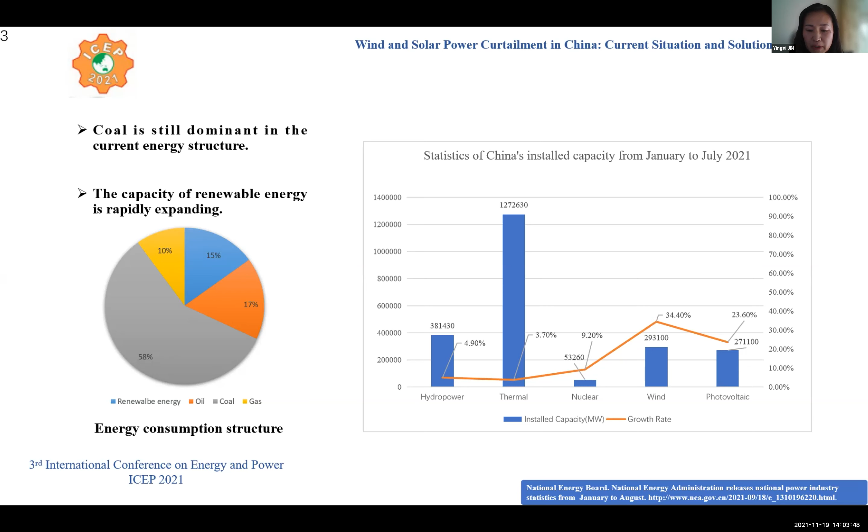Generally, wind and solar resources are abundant in China, but incredibly diverse across various areas. In 2006, the National Climate Center applied a data modeling method to assess the wind energy resource in China, concluding that at 10-meter height above ground level, the technically exploitable wind energy resource is about 2,548 gigawatts, corresponding to around 7,644 terawatt hours of power generation, assuming the annual average number of windy hours is 3,000.

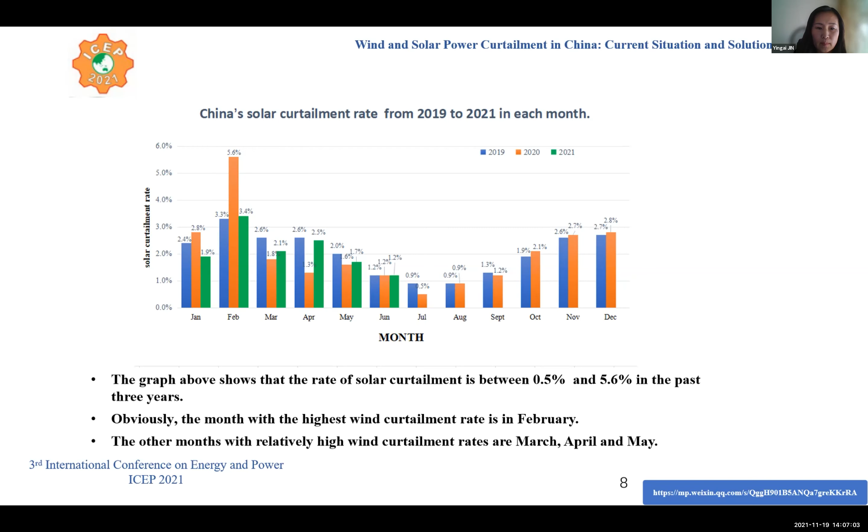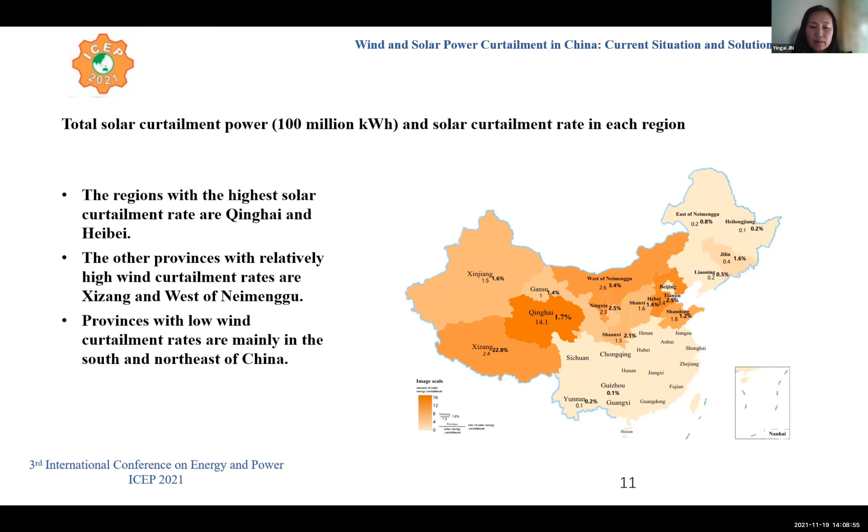Next, we'll introduce the phenomenon of wind and photovoltaic power curtailment in Jilin province.

Jilin province is one of the 10 million kilowatt level wind power regions. The installed capacity of Jilin province is 22.8 million kilowatts. Wind power has become the second largest power source in Jilin province after coal power.

The maximum output power of wind appears between 12 to 16 in spring and after 19 in winter. The minimum output power of wind appears between 10 to 16 in winter and after 20 in winter.

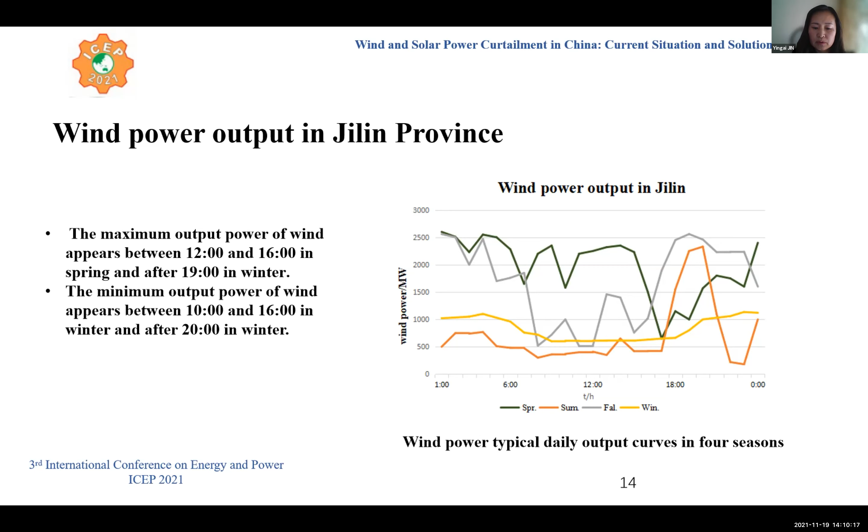During the heating season in winter, the CHP unit and the wind power generation conflict between 2 a.m. to 5 a.m. and 19 to 23 every day. At this time, it is the period of wind power generation, and the cogeneration unit will provide a corresponding heat supply during this period. The heat load is also relatively large, and the minimum power generation of the unit is also relatively large. The conflict between the two caused by this is prone to wind abandonment.

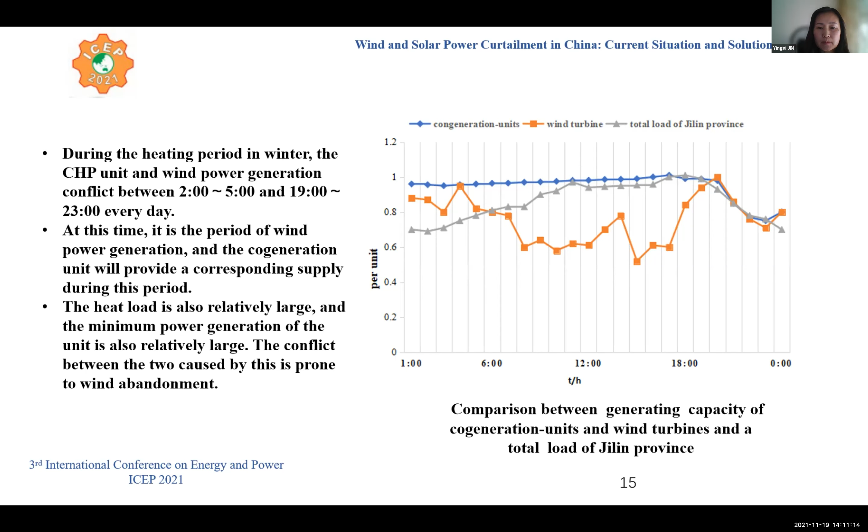Then I'll introduce the explorations and practices related to wind and solar power curtailment in China. In order to reduce wind and solar power curtailment, many measures have been undertaken.

From the perspective of methods used to stabilize the variation characteristics of wind and solar power output, there are two mainstream approaches at present. One method is to store the surplus wind and solar power in the period of peak output by using energy storage devices such as energy storage batteries and pumped storage hydropower stations, and release the energy in the period of low output in order to reduce the change amplitude in the overall output process. The other method is to form a complementary power generation system based on the complementary characteristics, natural or artificially regulated, of different power sources to achieve an overall output that is as uniform as possible.

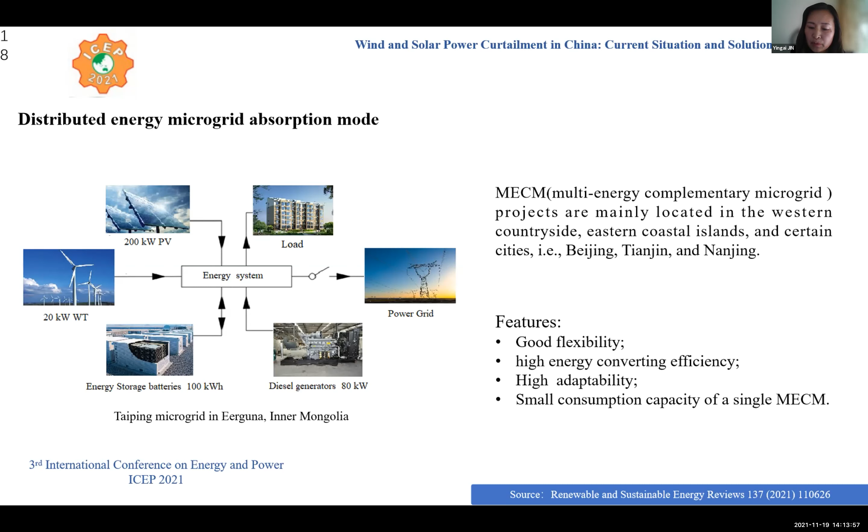The mode for transmitting wind and solar power directly into the local power grid uses the peak load regulation capacity and the frequency modulation capacity of a local grid to reduce the uncertainty of wind and solar power, as well as achieving new energy consumption. This has become the most mainstream mode of new energy utilization.

This is a power grid peak shaving operation consumption mode. To improve the peak load regulation ability of a power grid, large amounts of large-scale peak load regulation power sources, including reservoir hydropower stations, pumped storage stations, and peak load regulation thermal plants are often installed on the grid side.

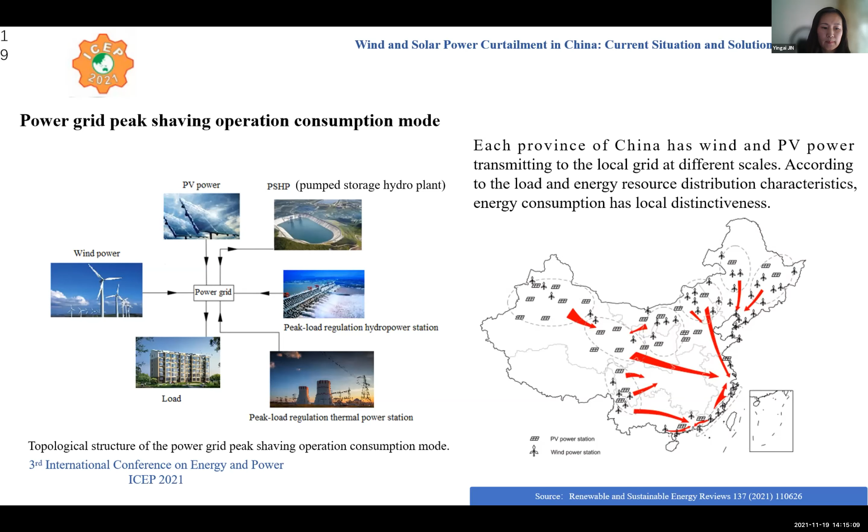Energy storage devices are used to reduce the uncertainty of wind and solar power, storing energy when wind and solar power is abundant and releasing energy if wind and solar power is insufficient. Achieving multi-energy complementation and consumption by forming a wind PV storage integrated energy system has become a feasible method.

A pumped storage hydropower system can store power by using surplus power to pump water to an upper reservoir and generate power by releasing water in the peak load demand period. Thus, PSHP is an excellent peak shaving power source.

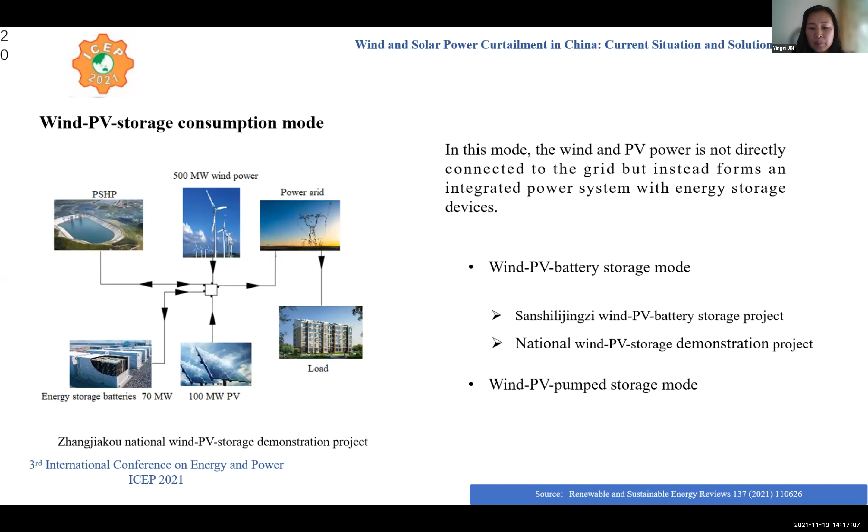Using PSHP's peak load regulation capacity to transform wind and PV power into hydropower and then form a stable output process to a power grid is a typical wind PV storage complementation mode.

Before new energy is transmitted and connected to the grid, the wind and solar power needs to be supplemented with other local power generating forms with peak load regulation capacity and then transmitted for grid connection.

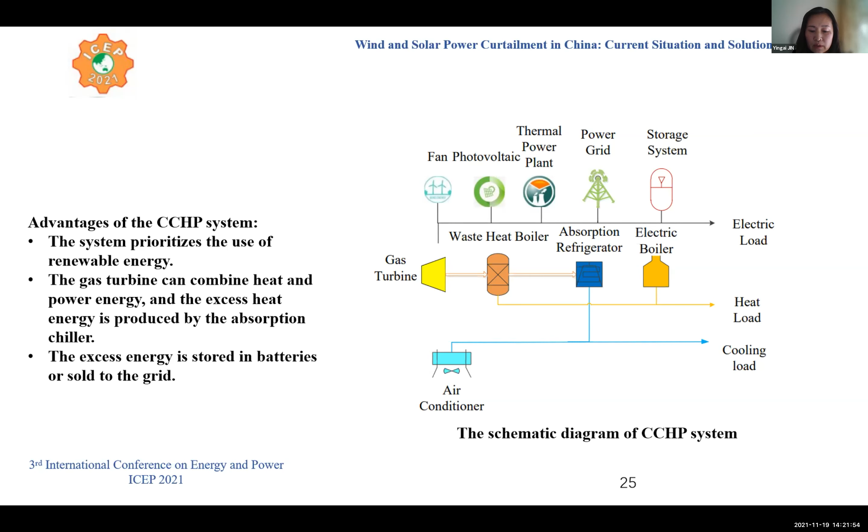The CCHP system has the following advantages. The system prioritizes renewable energy, which can achieve the purpose of energy saving, and the gas turbine can combine heat and electricity. The third advantage is that the excess energy of the system can be stored in the battery or sold to the grid.

The central core of multi-objective particle swarm optimization is the maintenance of external files, allowing the next generation of particles to have a variety of global best choices, enhancing the diversity of solutions in external files and making more non-inferior solutions evenly distributed on the target space.

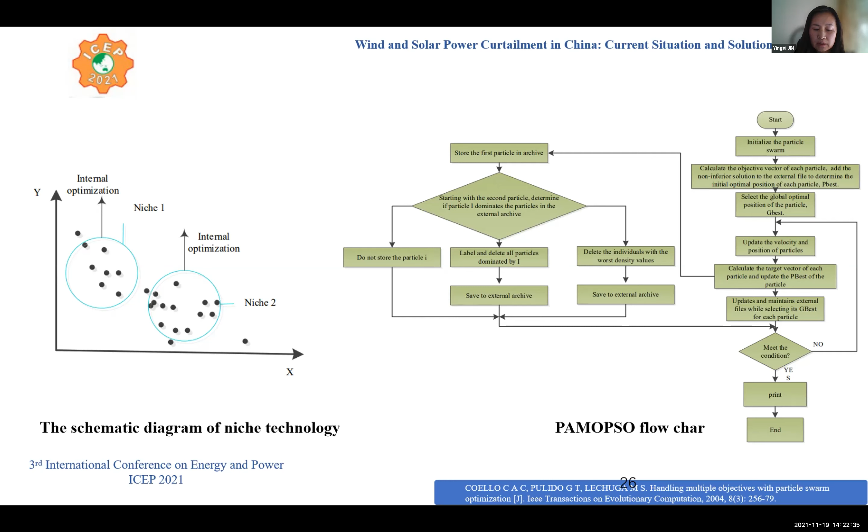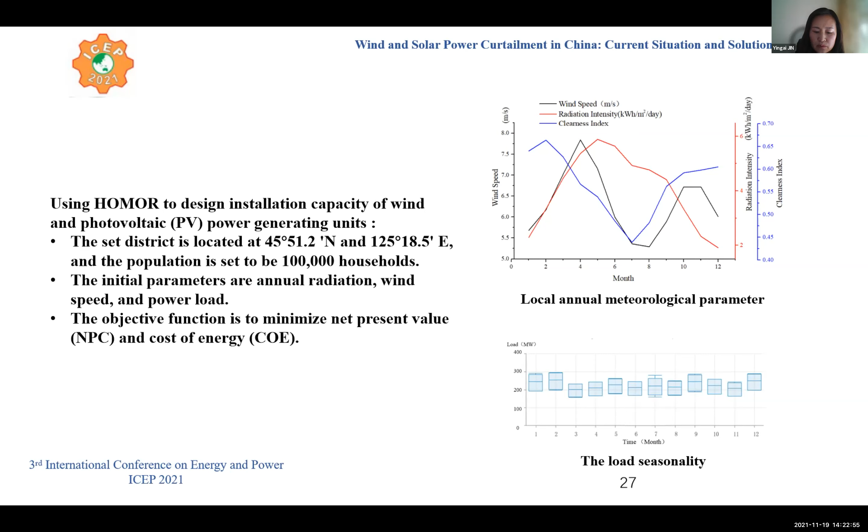The second solution is a joint search algorithm for energy scheduling of the CCHP system. This research proposes a joint search algorithm based on particle swarm optimization algorithm and Cuckoo optimization algorithm for energy management of the CCHP system.

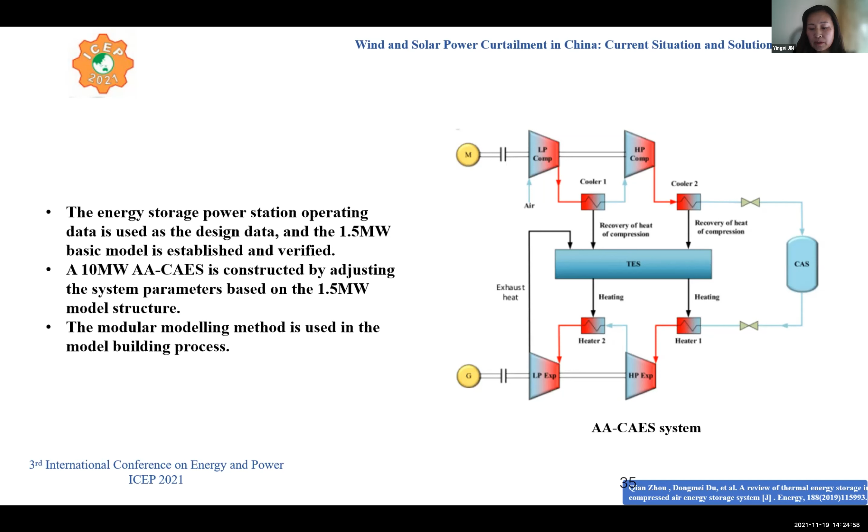The third one is an introduction to the construction of the AA-CAES system. Advanced adiabatic compressed air energy storage system is an emerging compressed air energy storage power station system in the world. It has relatively higher system efficiency than compressed air energy storage system. The construction of this system in the research is based on the structural model of the 1.5 megawatt demonstration power station of the Chinese Academy of Science. This system includes two-stage compression and two-stage expansion using interstage cooling and interstage heating.

This work has reviewed the renewable energy curtailment experience across several provinces in China to illuminate the breadth of experience and methods that have been effectively employed to manage curtailment levels. Based on China's experience and our research, the following suggestions are given for the trend. First, there is a potential to combine investment in renewable energy with power to gas, converting electricity to hydrogen via electrolysis for an alternative revenue.

Forecasting plays a central role in minimizing this uncertainty on operational time scales from real time to a few days ahead. Both wind speed and solar irradiance exhibit spatial-temporal correlation as a result of their dependence on large-scale meteorological phenomena.

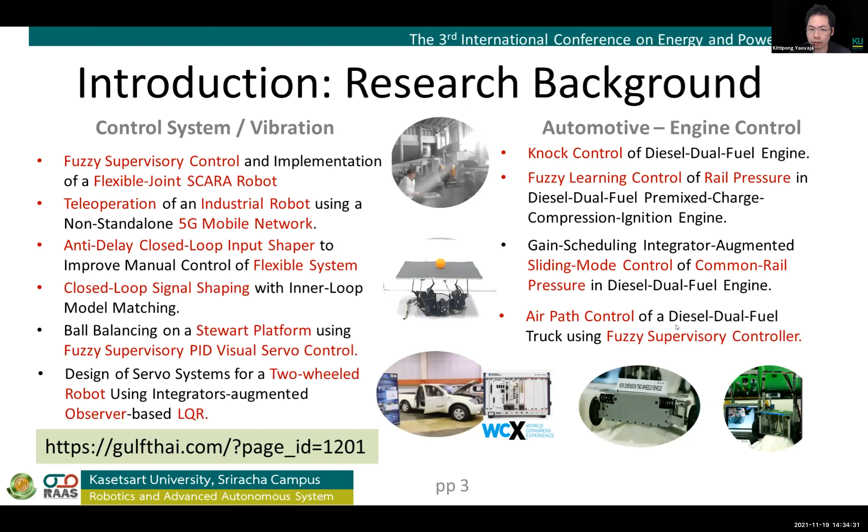So this is the introduction. I work on control systems for robotics and mechanical systems, and also implement it on automotive control for reducing emissions and improving performance. One important thing is to use alternative fuel to reduce diesel usage, and the benefit is reducing PM2.5.

We know that PM2.5 can cause health problems and diseases like cancer, and we have an air quality standard level for PM2.5 of about 65 micrograms per cubic meter. In many countries, including Thailand, Bangkok, Chiang Mai, we have a lot of PM2.5 emission exceeding the standard level.

We can reduce it, there are a few techniques. In China, we can use air purification - this is a big tower which can reduce a little bit of PM2.5, but that is still a huge problem we have to solve.

Then I think we have to eliminate it from the source, one of them is from traffic. PM2.5 we can measure using different techniques, we can use satellites to detect the emission.

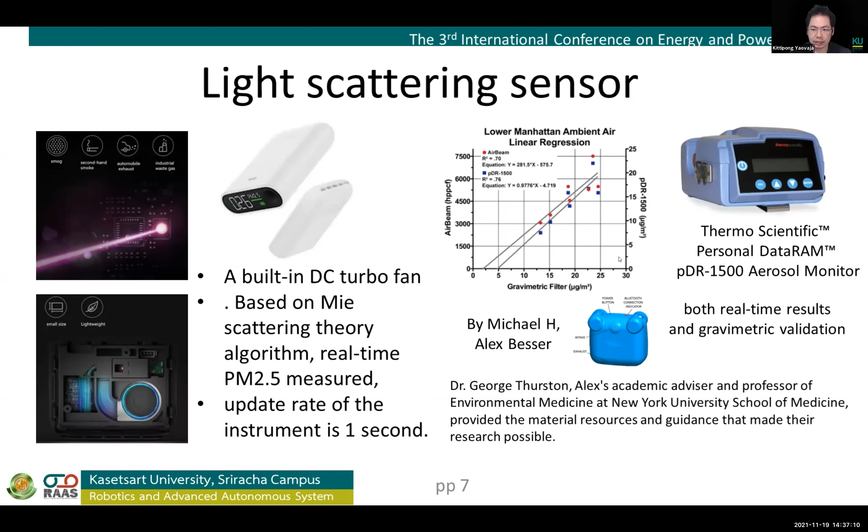So we found a lot of information that shows the calibration accuracy. This is the test between the light scattering sensor and the older technique sensor, which shows the trend of measuring data. It also depends on relative humidity, dew point, temperature, wind speed. And the right-hand side is FRM, the standard measurements used as reference or equivalent methods.

So in the low PM2.5 range we have high accuracy, with some variation at the high level. So it will affect some variations.

We know that diesel provides a lot of PM2.5 emissions, which directly cause a health problem. From previous research, we found it's about 100 times more PM2.5 than the gas engine, which uses natural gas. So we know natural gas could be more environmentally good, and we can replace it.

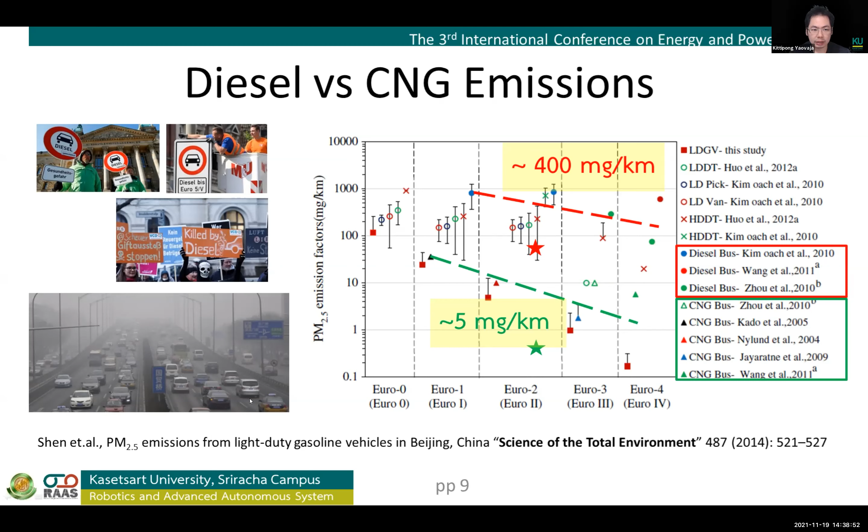But actually there are a lot of diesel vehicles, many millions of vehicles. We cannot replace them with electrical vehicles. It also depends on energy supply. So we have to think about how to reduce this.

We can use a dedicated or dual fuel engine. Dual fuel has a lower conversion price, and it can convert to dual fuel mode, which can have good efficiency, but the challenge is to control the combustion.

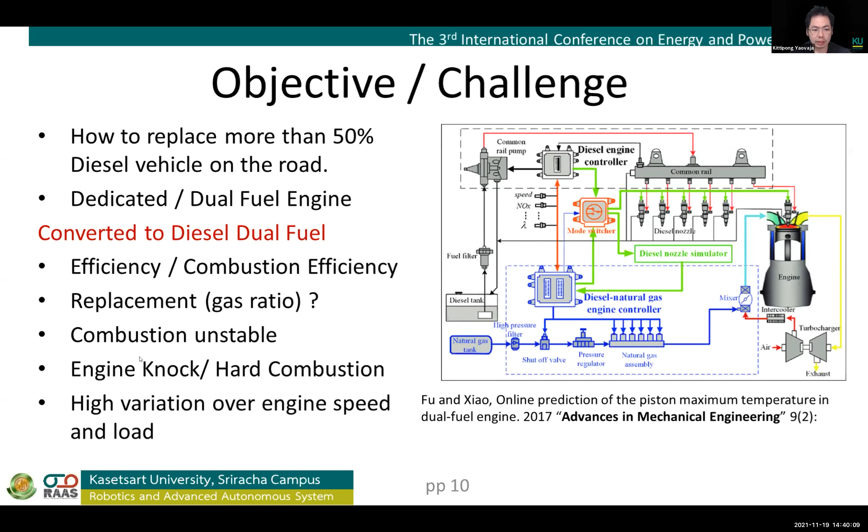We have to have a good control system to control the combustion. If we can control the combustion well, we can get good results. We can implement the control technique in other systems too, like in rockets, which still use combustion. We can control it to have less combustion knock, less hard combustion, and get good emission results.

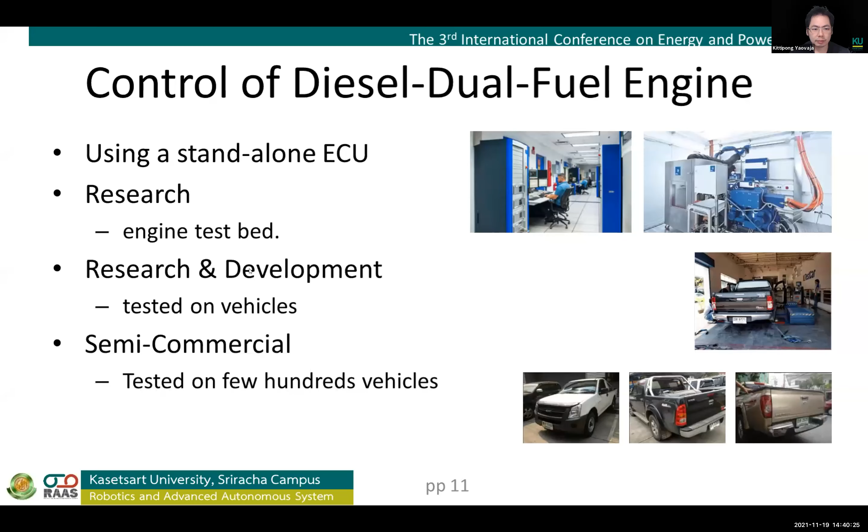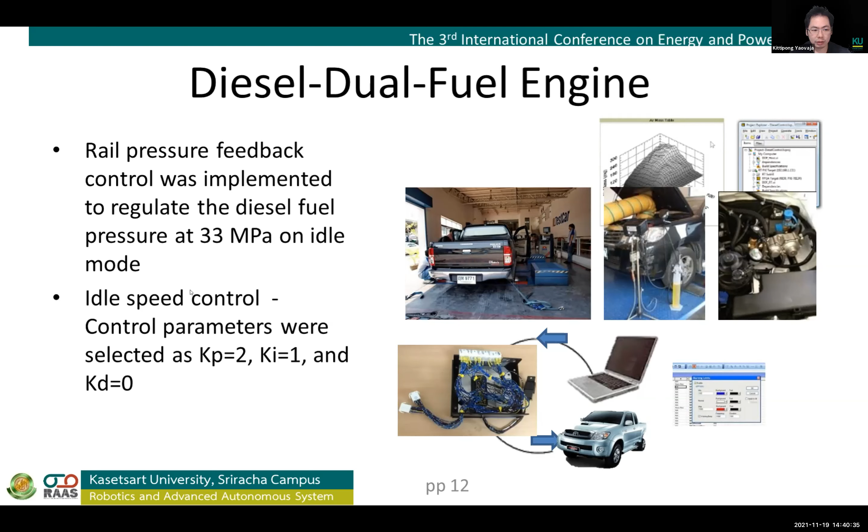We did some research on control techniques to reduce emissions. This research was implemented on a vehicle, where we used feedback control to control fuel pressure and idle speed control. Then we set up the experimental setup.

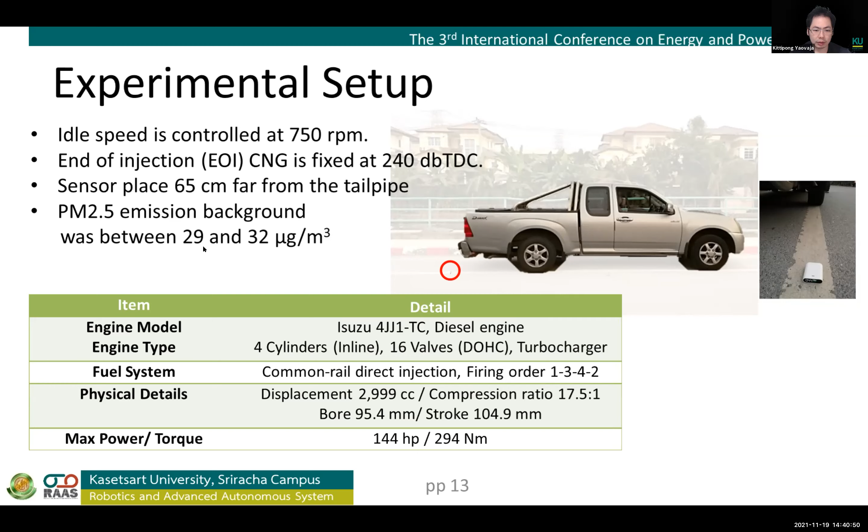We can reduce the emission from the tailpipe. We installed the sensor, and we have a PM2.5 background of about 30. This is the vehicle that we tested.

And the results: we can reduce the PM2.5 when we use more natural gas. It can reduce up to 10 times, up to 100 times. We can use natural gas about 80 to 90%. When we increase the milliseconds, this means the duration of the natural gas injection.

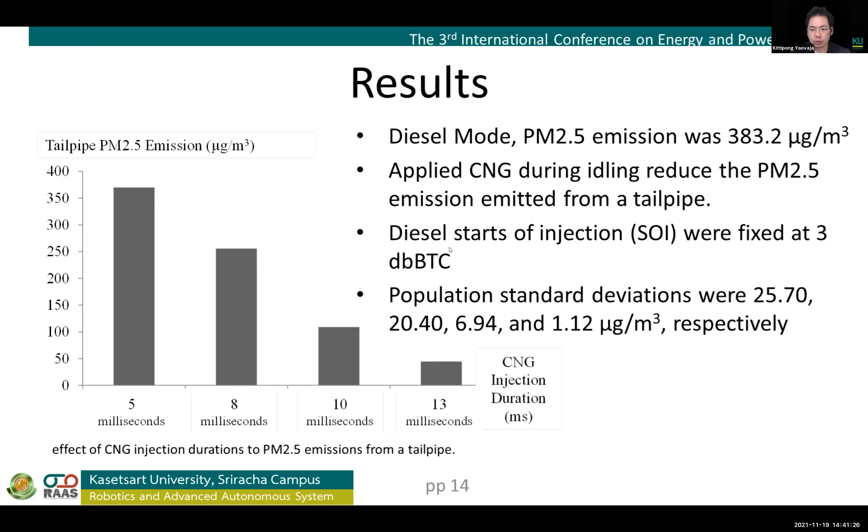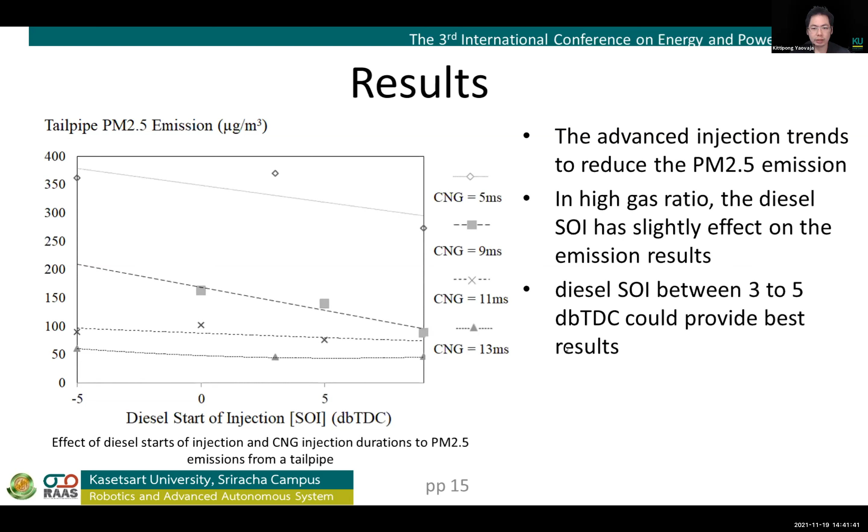So we have to control the combustion by also controlling the diesel injection. They have a slight effect from the diesel injection. We all know it affects combustion. So we tested the PM2.5 output relative to the injection of the diesel.

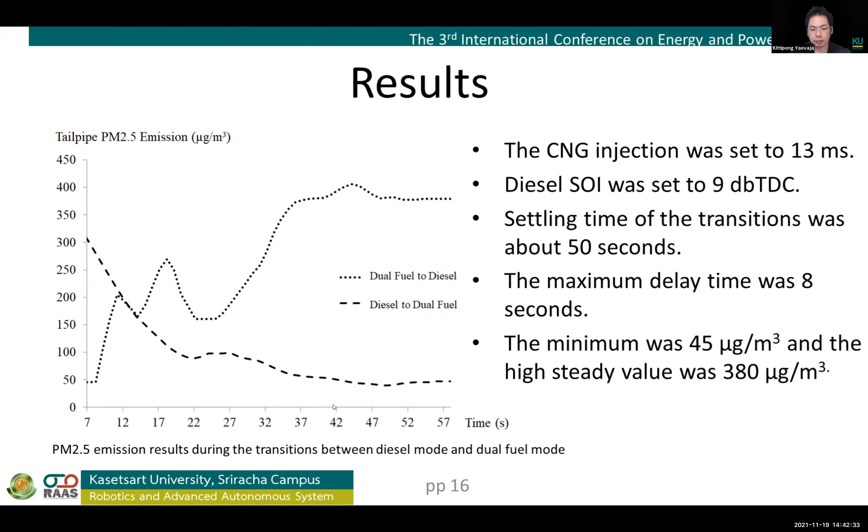We focus on engine idling because when we have high traffic and the car is parked, stopped and idling, it will cause emissions, especially affecting riders, pedestrians, and residents. We also use the emission sensor to detect it.

We can test the modified dual fuel engine with full control to reduce PM2.5 by about 10 times. We found the proper injection, start of injection, and we found the transition from diesel to dual fuel could affect PM2.5 for up to 50 seconds.

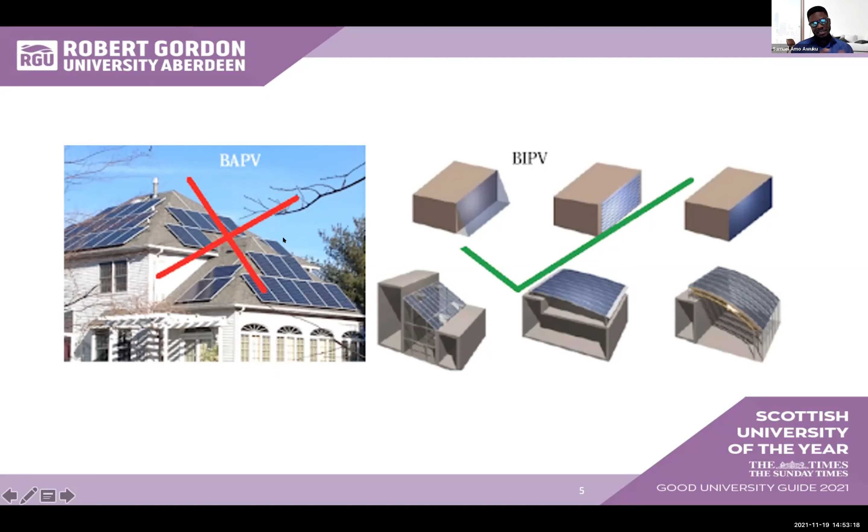I'm sure if we are asked to choose, most people will go for building integrated photovoltaics. Why? Because it is carefully integrated, it looks aesthetically pleasant, it is more appealing, it is beautiful. But on the left, it looks a bit haphazard, disoriented, unorganized.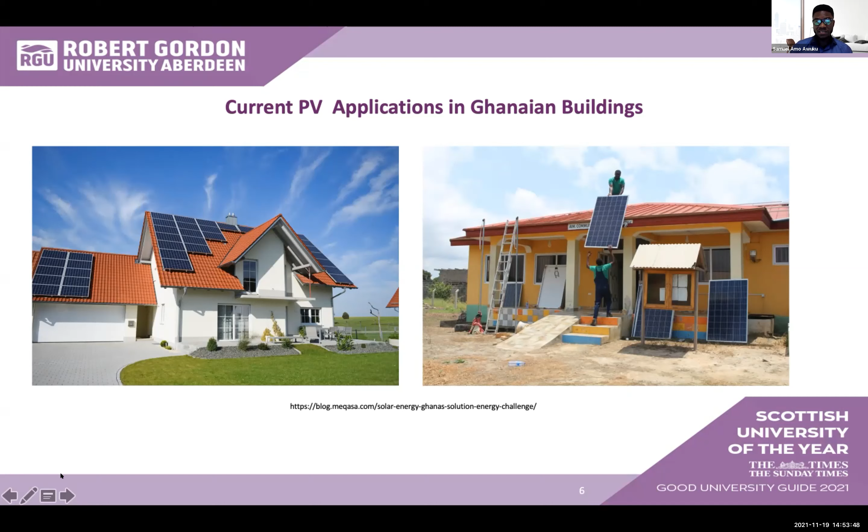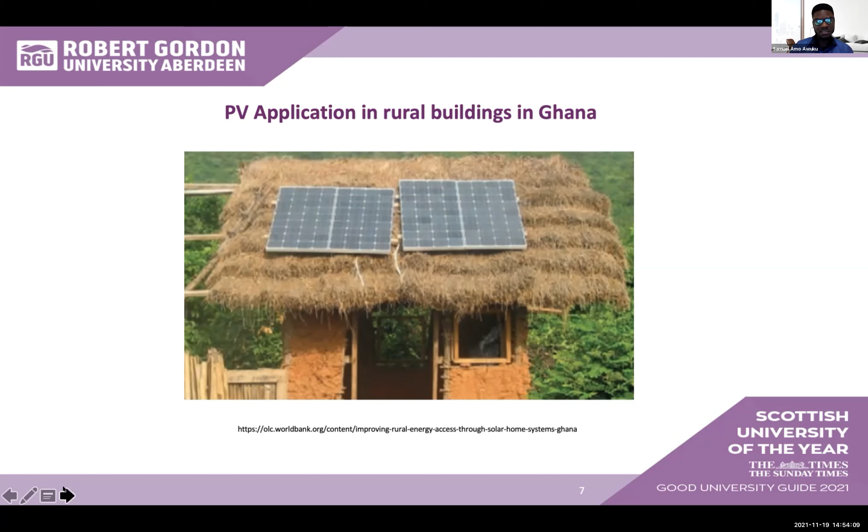If you look at this, it's a typical rural building in Ghana, where after constructing your mud house with huts and raffia on the roof, you have these solar PVs spread for basic electrification in a rural setting. In the contemporary or modern world, you find these PVs being incorporated into the building envelope such that they form part of the building, as we see in these figures, forming part of the roof and the facades, which are beautifully displayed.

So the big question here will be, why has the adoption of BIPV been relatively slow? People will talk about the high costs because, of course, these are expensive technologies, still not that cheap where many people can easily afford. But if you do the mathematics and the comparative analysis, you would realize that these BIPVs have some competitive advantage even over other PV applications.

And then we can talk about the technical limitations, where we look at whether there are a lot of technicians or people who have mastered a holistic way of applying these PVs into building envelopes such that we overcome the technical limitations. Are there technicians who can easily come over and fix a breakdown in the roof, just like you would have a carpenter fix your roof?

So we ask ourselves all these potential limitations, and then we can talk about the aesthetics. Aesthetics is also a major limitation, because if you are looking at a material that will potentially replace a conventional building material, then that material must be beautiful enough to appeal to architects, to potential homeowners, to potential adopters.

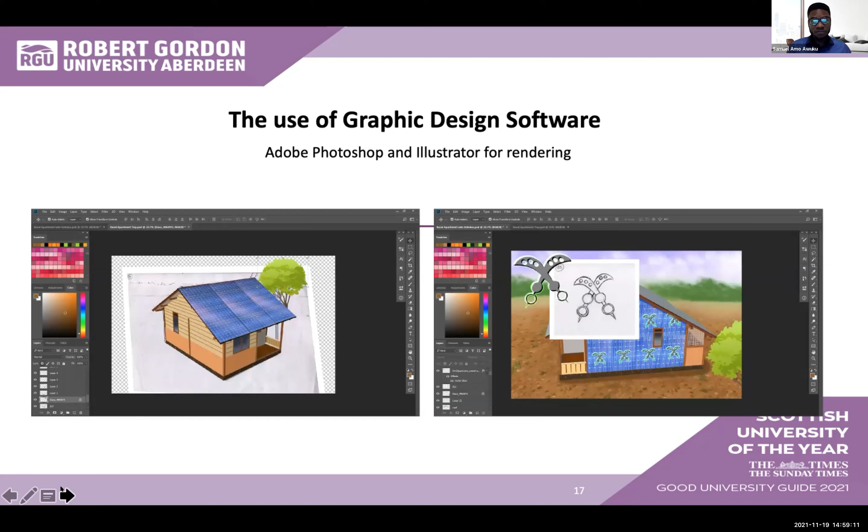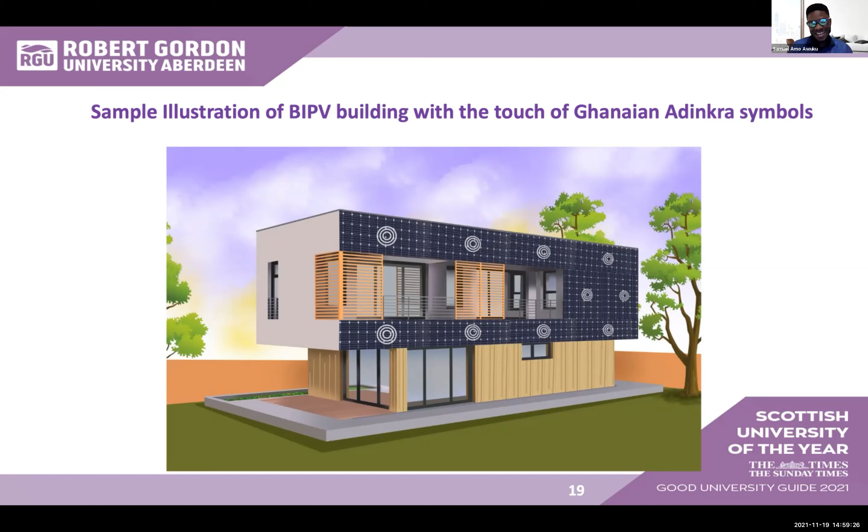So I conducted a simple architectural methodology called architectural visualization, where I used graphic design software to illustrate traditional buildings. And then I embossed some of these symbols just to give a visual effect of how these symbols will appear, or the outlook. And then we ended up with this very basic look. This is a classical example of a modest home or a rich man's house in Ghana, where we have some of these symbols being displayed on the facade.

So we did a simple market survey to analyze people's interest or how people will react to these symbols. And it appears that the majority of people went for the symbols. They said the symbols are nice and they'll be happy to incorporate the symbols if they are embossed on BIPVs. We had about 65% of the market indicating their interest in the symbols.

What are the implications? As observed, majority of the respondents, 65%, indicated that adding these symbols to solar design can influence the decision to adopt BIPVs. The remaining 35% said it would not matter to them. This gave an indication that incorporating traditional symbols into BIPVs when applying BIPVs may influence their adoption. This will help current and prospective homeowners to have a local feel of this relatively new technology, as these symbols are already familiar to them.

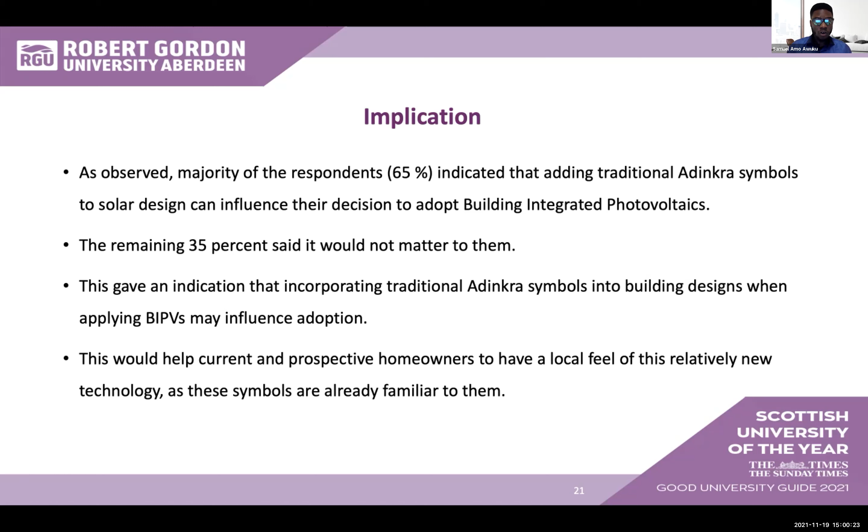These symbols can be general. There could be Japanese symbols, Chinese symbols, Scottish symbols, depending on where you are. So I believe that these symbols can go a long way to influence the adoption of building integrated photovoltaics across board. I'll be happy to take your questions now. Thank you so much to the organizers and to the government of Ghana through the Scholarship Secretariat for sponsoring this study. Thank you very much.

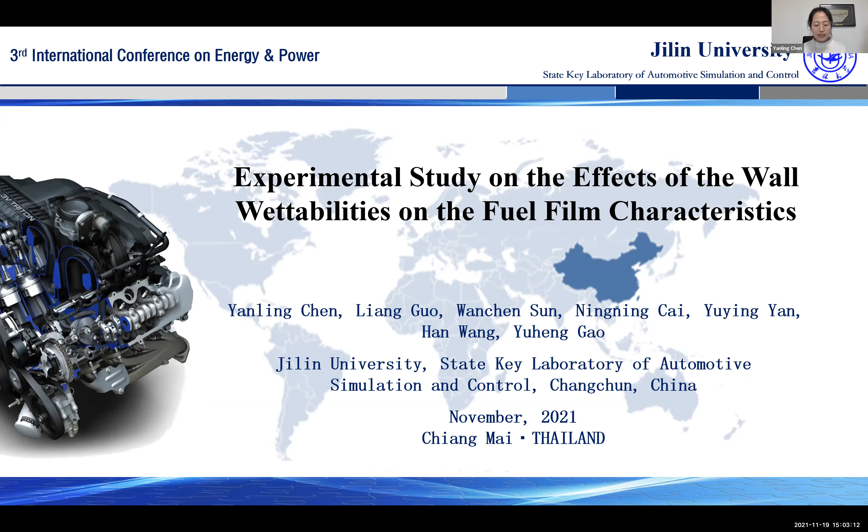Hello everyone, my name is Yanling Chen from Jilin University in China. I'm very honored to attend the third International Conference on Energy and Power. The topic of my presentation is experimental study on the effects of the wall wettability on the fuel film characteristics. My presentation will be divided into four parts: background, experimental materials and methods, results and discussions, and conclusions.

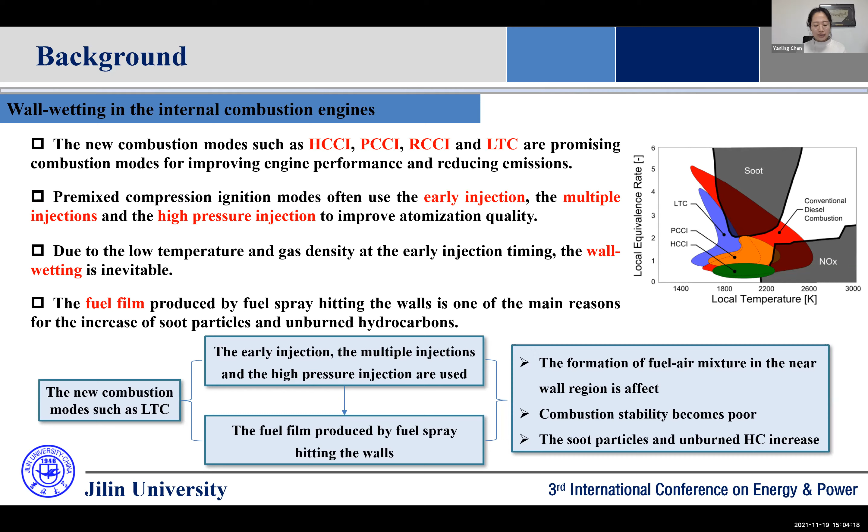Now let's look at the background. With the increase in the number of vehicles, energy shortages and environmental pollution problems have become increasingly serious. New combustion modes are often used to improve engine performance and reduce emissions. Premixed compression ignition modes often use early injection, multiple injections, and high pressure injection to improve atomization quality. Due to the low temperature and gas density at the early injection timing, wall wetting is inevitable. Therefore, it's particularly important to explore the interactions between the fuel and the walls and conduct in-depth research on the formation and evaporation of fuel films.

To reduce the hazards of fuel spray wall impingement, many scholars have carried out a series of research work on the optimization of fuel injection parameters, the design of combustion chamber structure, and the change of fuel properties. To further improve the controllability and stability of advanced combustion modes, the wettability of the surface can be improved in combination with bionic theory, aiming at the problem of wetting in internal combustion engines.

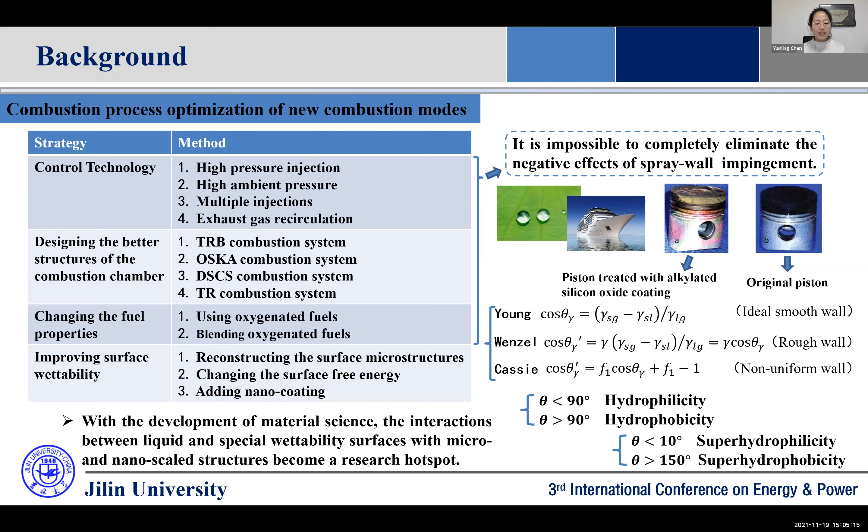The LIF method is used to study the spatial and temporal distributions of fuel films after impacting walls with special wettabilities and different wall temperature conditions. Now, I will give a simple introduction to the experimental materials and methods.

N-butanol fuel is selected as the test fuel. Rhodamine B is added as a well-characterized fluorescence tracer to generate adequate signal. The microscopic morphologies of the metal surface are measured and recorded using the scanning electron microscope.

The variations of the contact angles of the fuel droplets on the test metal surface with time are recorded with the contact angle measurement. The morphological developments and the evaporation process of the fuel films after impacting the surface are recorded with a laser test platform.

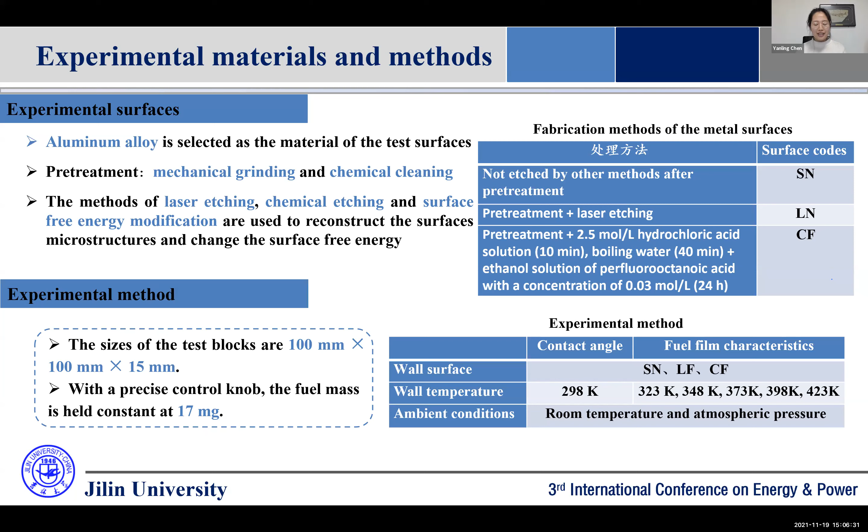The alloy is selected as the material of the test surface. The surface microstructures are reconstructed through laser etching, chemical etching, and surface-free energy modification. The development processes of the fuel films after impacting the surface at 5 different wall temperatures are investigated.

Third, results and discussion. From a macro perspective, the orthogonal grid structure is seen on the laser-etched surface, and the labyrinth structure is observed on the chemically etched surface. From a micro perspective, the micro-scaled convex domes and grooves and the nano-scaled protrusions are formed on the laser-etched surface. The rectangular shaped staggered cuboid boss/pits and needle-like structures are formed on the chemically etched surface.

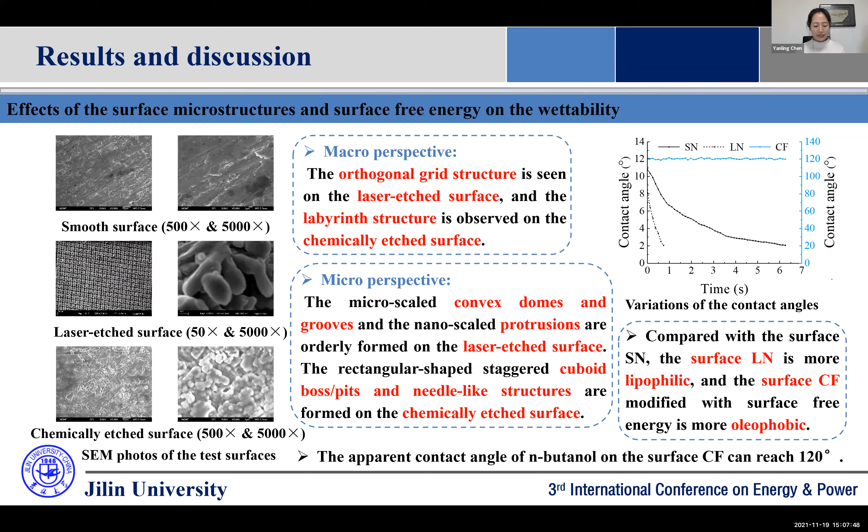The development process of the fuel films after impacting the different surfaces are investigated. It can be seen in the figure that at lower wall temperatures, the shape of the spreading area of the fuel films maintains an elliptical shape, and the fuel films show a hill-pack-like appearance. When the wall temperature is 398 kelvins, there are bubbles between the fuel films and the wall surface.

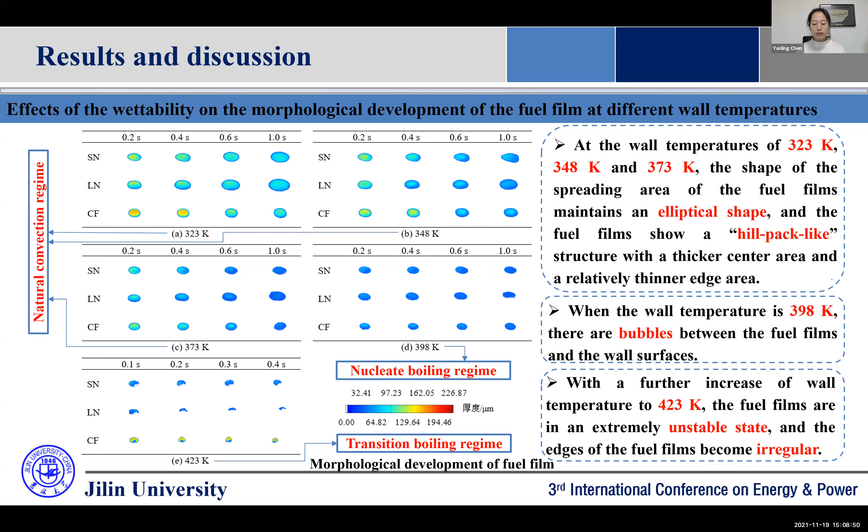With a further increase of wall temperature to 423 kelvins, on the surface Sn and the surface Ln, it is observed that a large number of bubbles are rapidly generated between the fuel films and the wall surface. In the experiments, it's also observed that a vapor film is formed between the fuel film and the surface CF.

To analyze the effects of the wall wettability and temperature on the film characteristics, the area average thickness and the mean square errors of fuel films after impacting the 3 surfaces at lower wall temperatures are analyzed.

It can be seen from the figure that in the process of increasing the spreading areas, the friction between the fuel films and the wall surface and the air resistance make the growth rate of the spreading areas gradually slow down. The results indicate that the stronger the lipophilicity of the surface, the larger the maximum spreading area of the fuel films.

When the wall temperature is 398 kelvins, there are more small bubbles on the lipophilic surface LN. The upward movement of small bubbles in the fuel film promotes evaporation. However, on the oleophobic surface CF, small bubbles are easy to gather, and the heat transfer rate is reduced, which is the main reason that affects the evaporation rate of the fuel film.

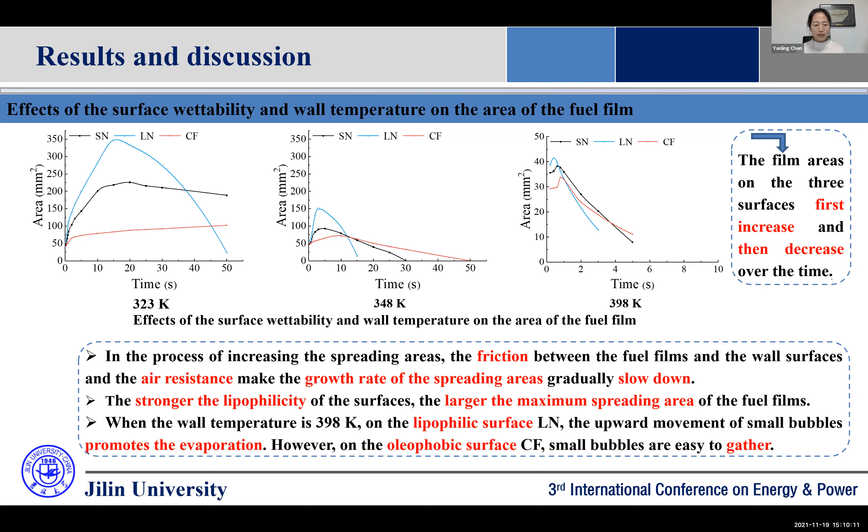It can be seen from the figure that due to the continuous evaporation of butanol, the fuel films on the three surfaces with different wettabilities become thinner. The overall thickness becomes smaller, the maximum thickness becomes smaller, and the fuel film distributions are more uniform. As the surface lipophilicity increases, the fuel film thickness becomes more uniform.

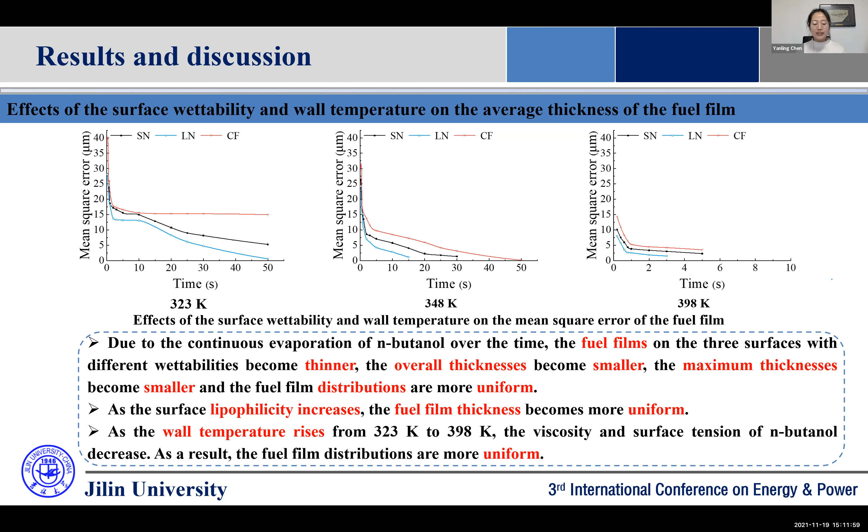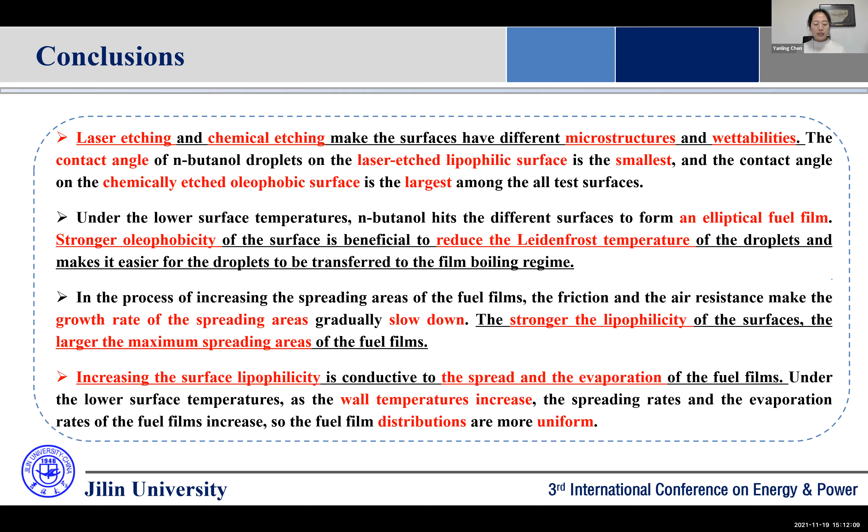Finally, this part is the conclusion. The previous part has been introduced in detail, so I won't repeat it here. That's all. Thank you for your attention.

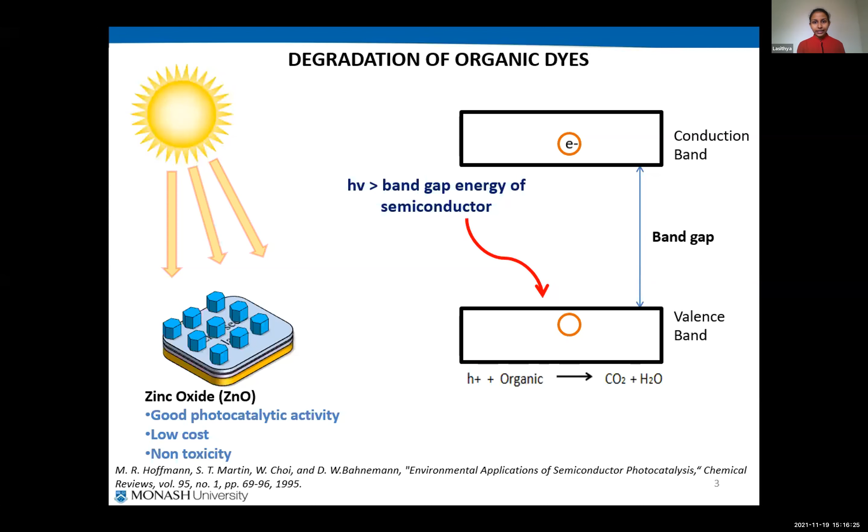And in hydrogen generation, the holes will take part in the oxygen evolution reaction, producing oxygen, and the electrons will flow to the counter electrode through the external circuit and take part in the hydrogen evolution reaction, generating hydrogen.

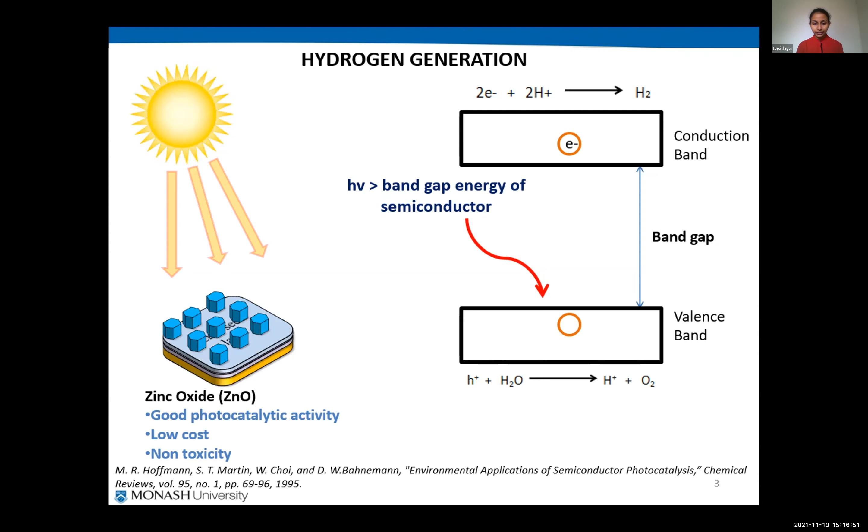So for this research, I've chosen zinc oxide as the semiconducting material due to its good photocatalytic activity, low cost, and non-toxicity. However, the main drawback of this photocatalysis process is the high recombination rate of the photogenerated electron-hole pairs, which will dissipate energy in the form of heat.

So to reduce this recombination, what we can do is use a composite of the photoabsorbing material along with a charge carrier transporting material. So I've used carbon nanotubes in this study due to their hollow nature, which provides a large specific area. Other than that, these carbon nanotubes act as adsorbents themselves, meaning they will adsorb any organic molecules present, which will further improve the dye degradation results.

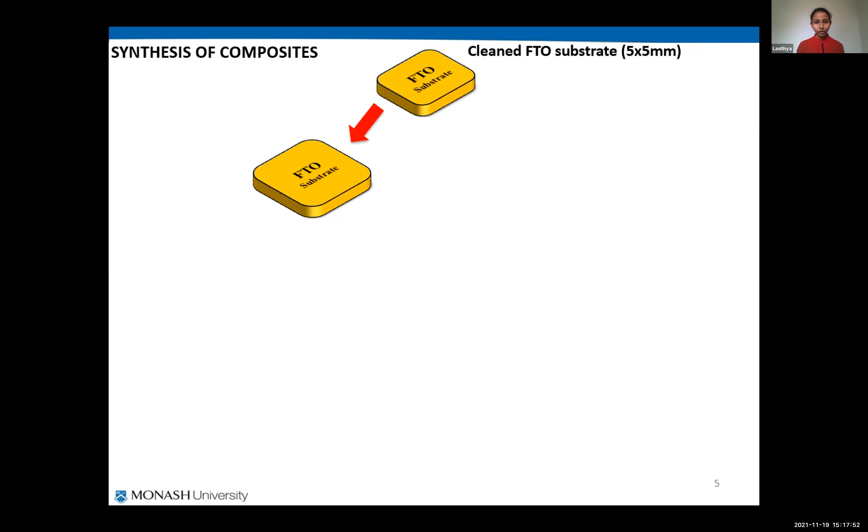Moving on to the synthesis of the composites. In this study, I've prepared 2 composites with distinct morphologies. I've used FTO as the primary substrate, and to prepare the layer by layer sample of zinc oxide CNT nanocomposite, I've deposited 3 layers of acid-treated CNT on top of cleaned FTO, followed by 3 layers of zinc oxide seed solution spin-coated on top of the CNT. And then I've annealed it and grown it to obtain the zinc oxide nanorods. That's how the layer by layer sample was prepared.

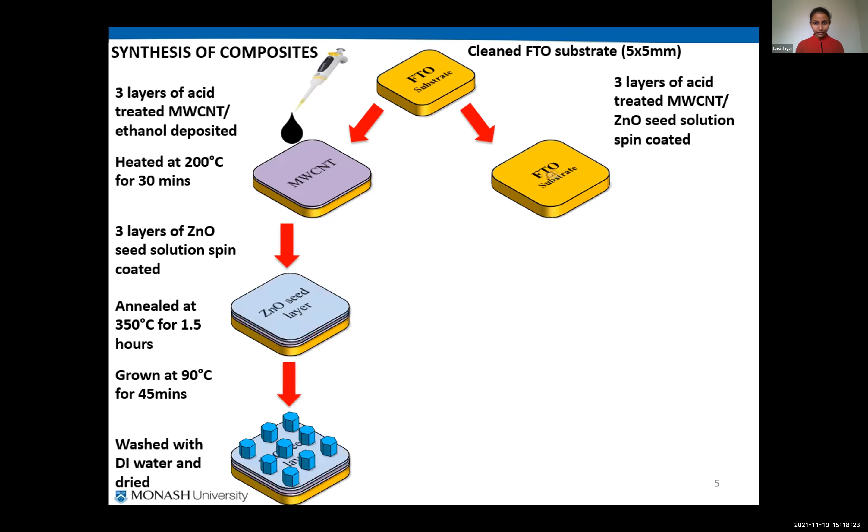And to prepare the mixed sample, I've spin coated 3 layers of acid treated CNT zinc oxide on top of cleaned FTO. And then it was annealed and grown as well to obtain the nanorods. Both these samples were washed with DI water and dried before they were used for testing. So to carry out the dye degradation test, I've used Congo red dye, which is a light red color dye.

All these samples were tested using an AM 1.5G filter and a UV filter. They were left in darkness for around 1 hour to make sure they reached adsorption-desorption equilibrium between the dye molecules and the nanocomposites. After that, the UV spectrophotometer was used to obtain absorbance readings every 30 minutes for the next 3 hours.

Moving on to the characterization tests, I've done 3 characterization tests here: FESEM, XRD, and optical characterization.

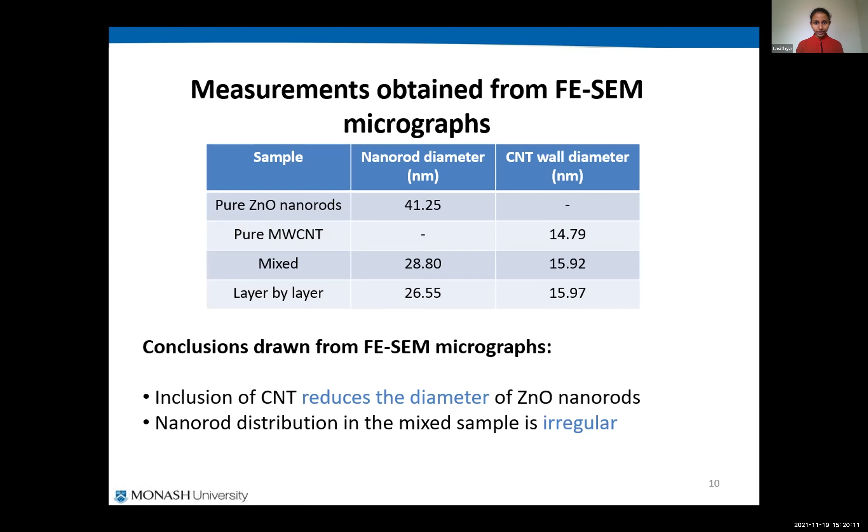From the FESEM micrographs obtained, it could be seen that inclusion of CNT reduced the diameter of the zinc oxide nanorods, as seen in the readings obtained for the mixed and layer-by-layer samples compared to the pure zinc oxide. It could also be seen that the nanorod distribution was irregular in the mixed sample compared to the others. This slide shows the pure zinc oxide nanorods, the pure CNT, the mixed sample, and the layer-by-layer sample.

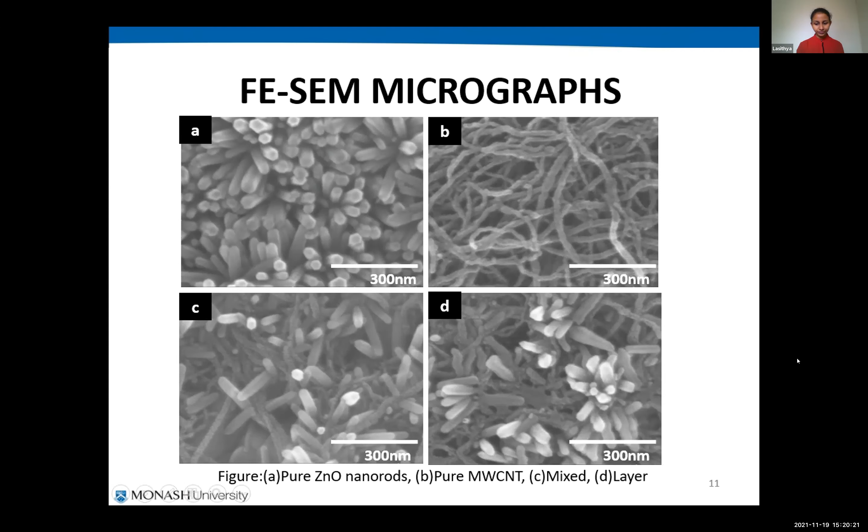Moving on to the absorption spectrum, it can be seen that the absorption edge of pure zinc oxide is around 368 nanometers, corresponding to a band gap energy of 3.37 electron volts. The mixed and layer-by-layer samples had similar absorption edges, so all 3 samples exhibit absorption in the UV region. Based on these results, we can expect good photocatalytic activity under UV illumination.

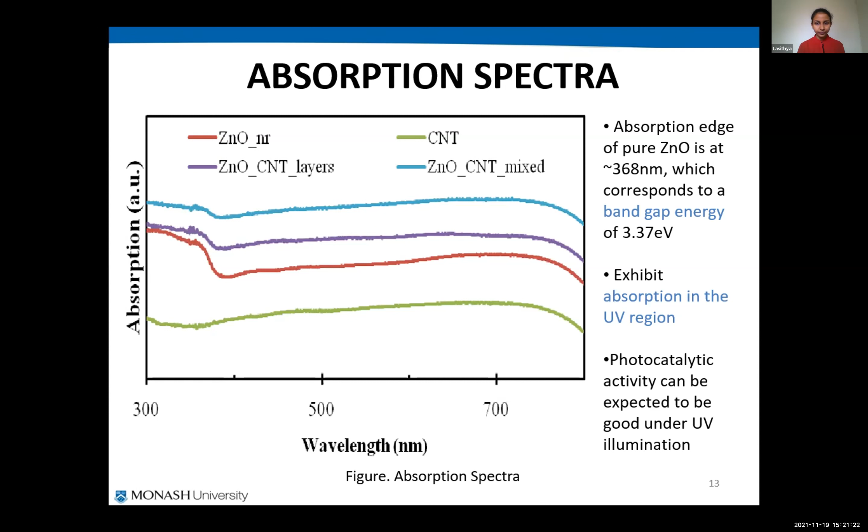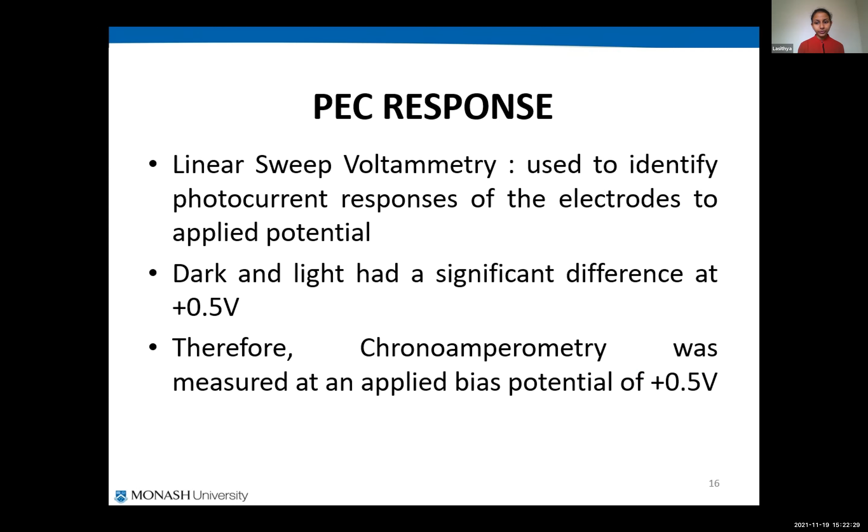Linear sweep voltammetry was carried out first to identify the photocurrent responses of the electrodes to different applied potentials. Based on those results, there was a significant difference between dark and light conditions at plus 0.5 volts. Because of that, chronoamperometry results were measured at an applied potential of plus 0.5 volts.

This slide shows the chronoamperometry results obtained. Again, the layer-by-layer sample showed the highest photocurrent density under both UV and AM 1.5G filters, followed by the pure zinc oxide nanorods, the mixed sample, and finally the CNT sample. The samples performed better under UV compared to AM 1.5G, with results almost twice as high under UV.

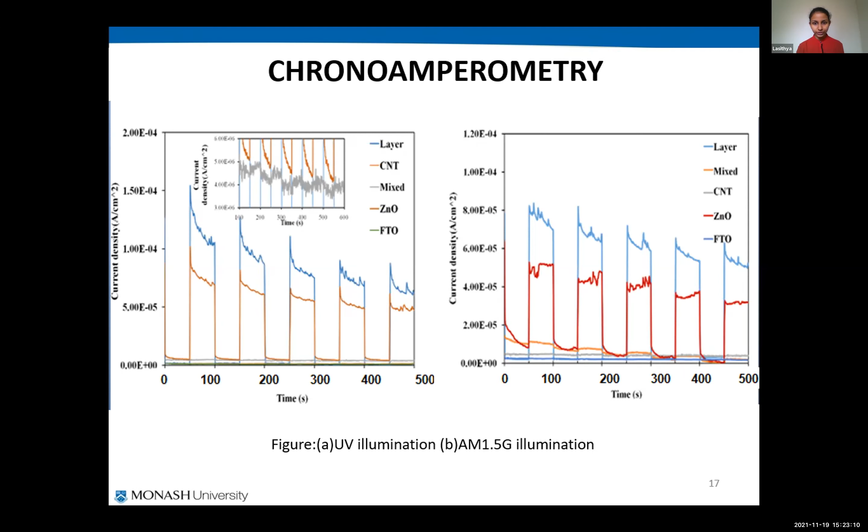Moving on to the highlights of findings: incorporation of CNT improved both the photocatalytic and photoelectrochemical activity of the layer-by-layer sample, as expected. This is due to faster separation and transportation of the photogenerated electrons, reducing recombination, the smaller particle size of the nanorods leading to a larger surface area, and the presence of nanorods aligned along the z-axis.

However, inclusion of CNT did not increase the photocatalytic or photoelectrochemical activity in the mixed sample, attributed to fewer nanorods present, their irregular distribution, and the nanorods not being aligned along the vertical z-axis. Also, all samples showed higher results under the UV filter compared to AM 1.5G, and the ranking for both dye degradation and PEC followed the same trend, with the layer-by-layer sample showing the highest results, followed by the pure zinc oxide nanorods, the mixed sample, and finally the pure CNT.

For future recommendations, because zinc oxide is thermally stable, dye degradation and PEC could be carried out under different temperatures and pH values, and the optimum parameters could be obtained.

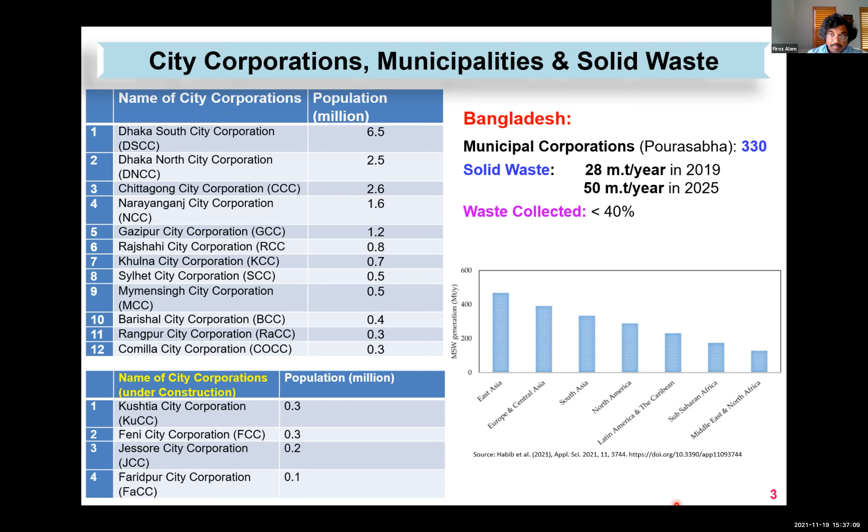Now, one philosophy of municipal solid waste management is the waste management hierarchy. Of course, the most preferred approach is reduction at the source and reuse of material. That's why we need to develop a policy so people can reduce excessive use of materials and reuse as much as they can in this process.

So that is the most preferred management of solid waste. The second one is recycling and composting, which is the second most preferred method or stage. The third one is recovery of energy. And the last one, which nobody prefers, is treatment and disposal.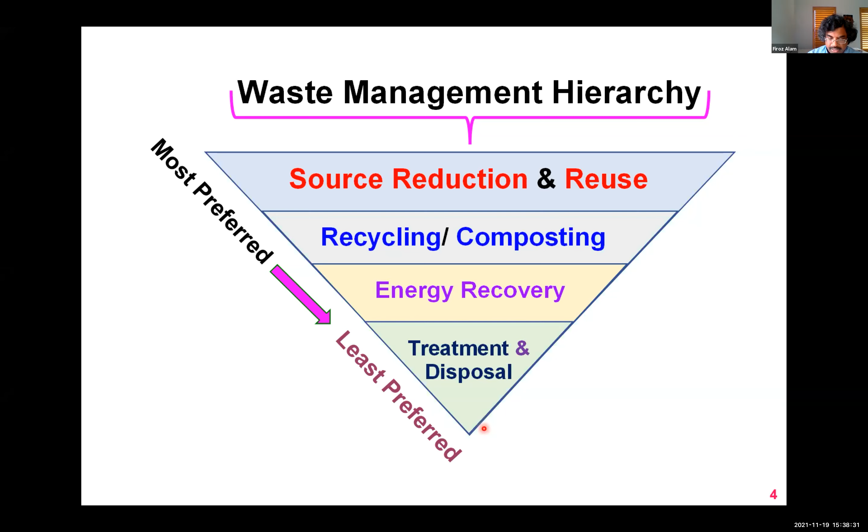That is the biggest issue in all developing countries, including Bangladesh. The reason is most of the solid waste is going to the surroundings and the atmosphere, particularly rivers and other places, without treatment, and disposal has virtually no processing at all. That is an absolutely bad thing. That's the case in most developing countries. Treatment is very important, but unfortunately, in developing countries, we are significantly falling behind.

Ideally, the municipal solid waste management process should follow a schematic like this one. As you can see, it starts with a proper collection system from the location of the solid waste, and then it is sorted out. From there, some of the high value stuff—recyclable glass, metals, aluminum—should be separated.

Then organic matter will go for other processing. From there, some of these things will go for compost preparation, some for fertilizer, and some for biogas production. Biogas can later be used as natural gas, or for power generation, heating and cooling, or for a heating system for the house and so on. So this is the ideal process.

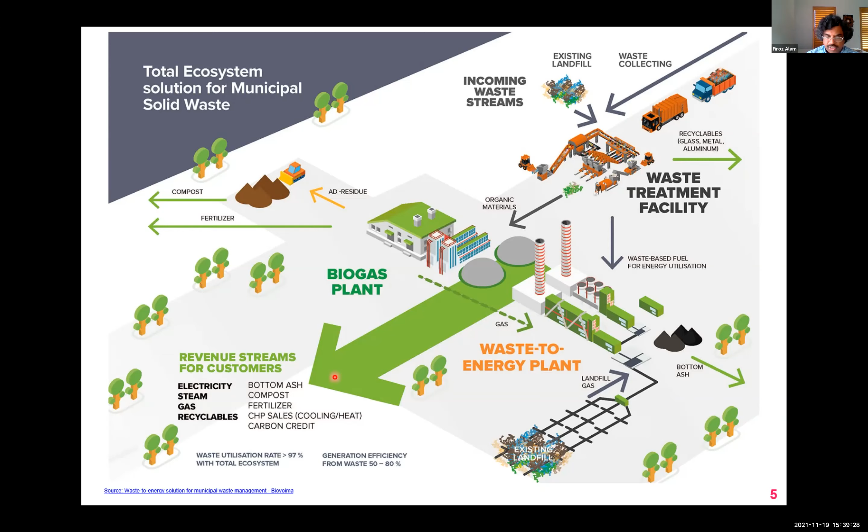But unfortunately, most developing countries, especially Bangladesh, are far away from this process. So the objective of this paper was to review the municipal waste recycling status in Bangladesh, and then explore some power generation potential from municipal solid waste based on waste-to-energy for sustainable economy and development.

In 2011, a project was enacted in Bangladesh at a cost of US $180 million to introduce an integrated municipal waste management system. The funding was $120 million from the Asian Development Bank, $13 million from Germany, $13 million from the Swedish International Development Cooperation Agency, and $34 million from Bangladesh.

The target area was to introduce this integrated waste management system in 5 city corporations, including the largest city corporation of Bangladesh, Dhaka, as well as 12 municipalities or Pourashavas and 36 urban centers. But unfortunately, due to bureaucracy and other issues, it took very long. Finally, one of the backbenchers from the 12 municipalities came forward and said, okay, we'll go for the pilot project. That was called Jessore Pourashava, the place where I was born.

That is the pictorial view of this integrated waste management system in Bangladesh, first introduced in Jessore, the central-western city of Bangladesh. Myself and also Professor Shombat Chattopadhyay, who is also here today, got the opportunity in December 2019 to visit this place for a short time.

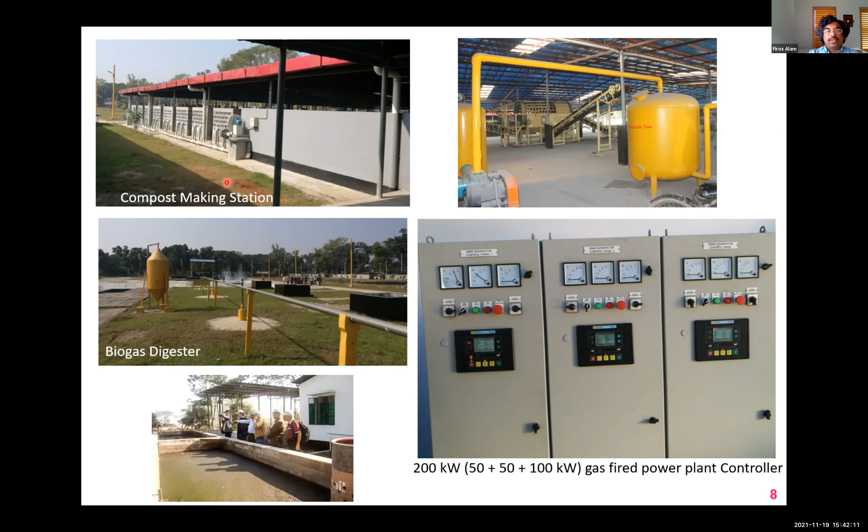This is the picture of the compost area where they're making compost, and also the biogas biodigester area, as you can see here, and some liquid elements also here. In this particular integrated solid waste management system, they actually installed a 200 kilowatt biogas powered power plant. When we were there, we saw 2 units running, each 50 kilowatts. At the moment, they told us that most of the power generated by the biofuel gas, which is generated locally, covers their electricity needs in this area.

Then the principal author of this paper collected some data in the Dhaka City Corporation, based on face-to-face survey, telephone, and online survey over the stakeholders. He compiled and analyzed a report. As you can see, this table shows plastic, paper, glass, metal, and compostable waste. Although plastic, paper, glass, and metal have good recovery rates, the compostable waste recovery is virtually zero.

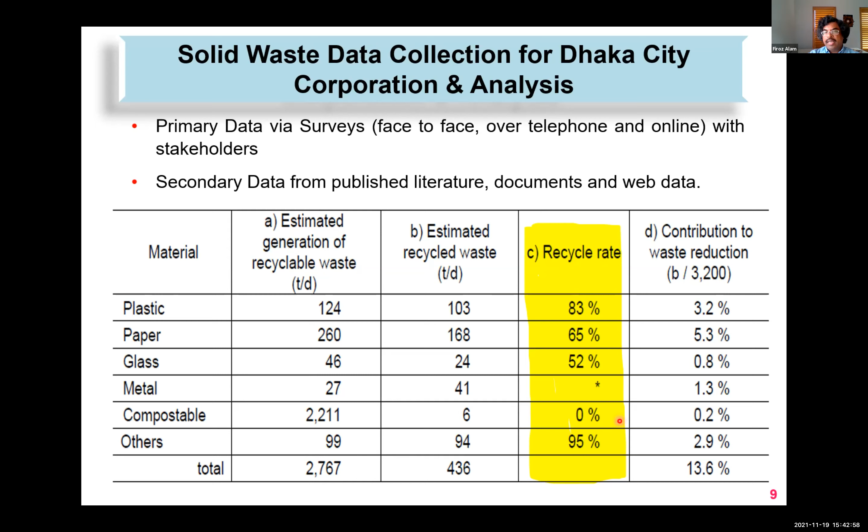And that is the problem, because it is now going unused directly to the rivers, directly to the canals, and also all other places, and they are highly contaminated.

They also looked at some of the heating value content in those materials. As you can see, plastic has the highest number, 6,700 kilojoule per kilogram, followed by textiles, and then paper and paper products. There are some other products which have less heating value, although they have some higher energy content.

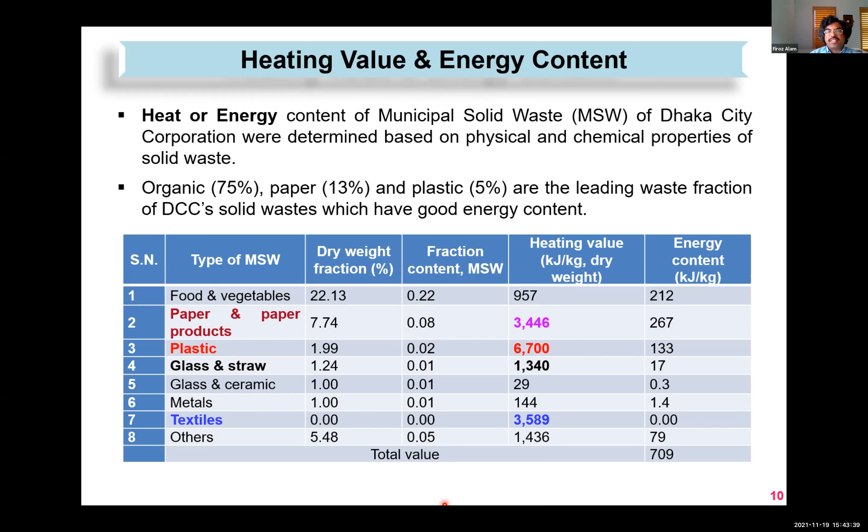On the other hand, in the general nature of the solid waste coming from Dhaka metropolitan city, because there are 2 city corporations, north and south, together their organic compound is 75%, paper is 13%, plastic is 5% among them. So these are the situation at the moment.

If you look at the total solid waste globally, landfill goes around 46%, recycle 19%, and waste to energy is 17%, and other is there.

This table also shows some different technologies, how to process and get energy and recycle the municipal solid waste, and some of the processes done in incineration, gasification, anaerobic digestion, LFG gas recovery, and pyrolysis, and so on.

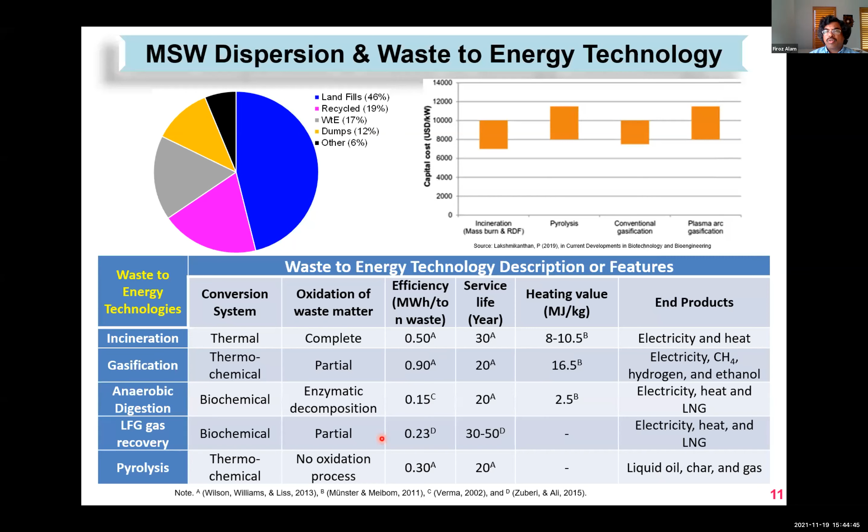If you look on the top right hand side, this figure also shows you the cost of each of the technologies. You can see some of the technology, particularly pyrolysis, is a little bit of an expensive zone. But incineration is probably the most affordable, and most probably it will be affordable for developing countries where finance is limited, and also conventional gasification, but it takes a long time.

Incineration capital and operational cost, revenue cost, that is incineration ultimately, and the revenue of the landfill gas, and then also landfill capital and operation cost, and revenue of incineration compost cost.

So all these things, as I said, up to 2015, data is based on available data, and for prediction starting from 2020, because there is no reliable data 2020 and onward here. But this has a lot of assumptions, and these assumptions need to be further looked into very closely to get the real picture of this cost.

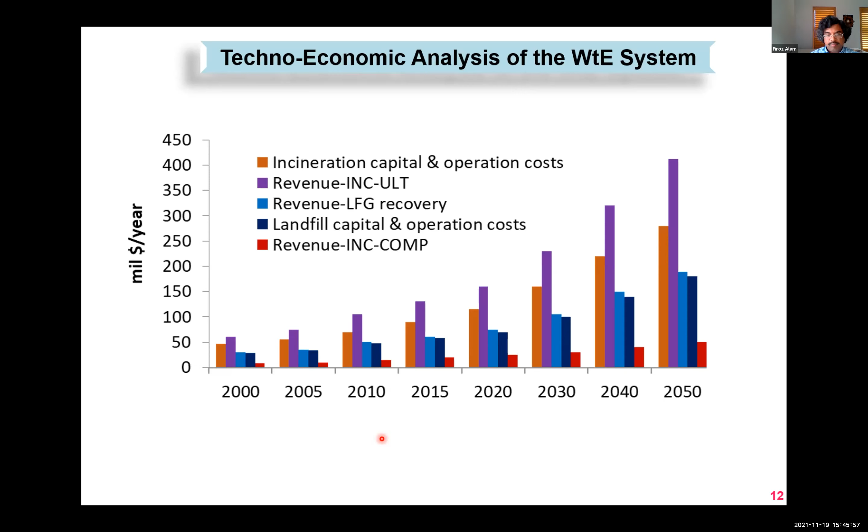So to conclude this little work for the Bangladesh perspective: with the growing economy and rapid urbanization, Bangladesh urgently needs an integrated municipal solid waste management system.

Unfortunately, most of the municipal corporations and city corporations do not have it. Only Rajshahi and also Chittagong and some others at the moment have this in place. Municipal waste collection system is extremely poor in Bangladesh.

I did not show you a picture here, but it is a very medieval system. That cannot continue. It is very hazardous and dangerous even for the people working there. There is no professional health and safety. We cannot use that system. It definitely needs to be changed.

Experience and expertise from Jessore's integrated municipal solid waste management system is vital for replication and sharing across the country. Because that experience, what is good, what is not good, what suits Bangladesh, what does not suit Bangladesh, they can actually learn from there and rectify and move on, instead of reinventing the wheel again and again for every city, and then later on that wheel may not work.

Large city corporations such as Dhaka, Chattogram, Sylhet, Rajshahi, Khulna, Narayanganj have good potential for biogas generation because they have a sufficient amount of solid waste. Smaller cities do not have this.

That's why our suggestion is smaller city corporations and municipalities should be clustered together for each of these integrated systems, so that they have enough solid waste to use for biogas or even for fertilizer composting system generation.

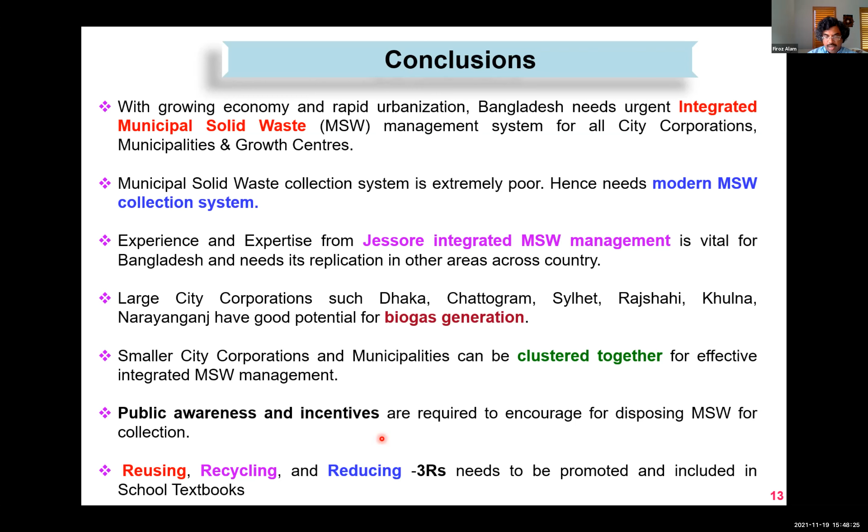And also, it would be better to include this awareness in the national textbook in the schools, so that our school children become familiar with this and they will practice these things in their future life. And with that note, I thank you all, and I'll be happy to answer any questions if I can.

I want to react. It is an excellent presentation. I just want to know if there is any possibility of foreign direct investment in Bangladesh for solid waste management, maybe from World Bank or Asian Development Bank or those kinds of things, if any information is there? It's a very good question.

Generally, private investment is very rare in waste management, because sometimes there are a lot of things involved, particularly in developing countries, where the exact economic data needed to generate an economic model for benefit and return of investment is difficult to obtain. That's why private investors, local and international, it doesn't matter, are not very enthusiastic about investment in this solid waste management system. But international organizations like the Asian Development Bank, as you saw, invested $120 million in one pilot project in Bangladesh, and also to replicate in other areas and city corporations in Bangladesh. But World Bank unfortunately has a different priority, so it is a little bit harder to get funding from them directly. So most of these things are considered low priority for developing countries, and most of the money comes only from development aid agencies. But from organizations like World Bank, Asian Development Bank, it is very, very meager.